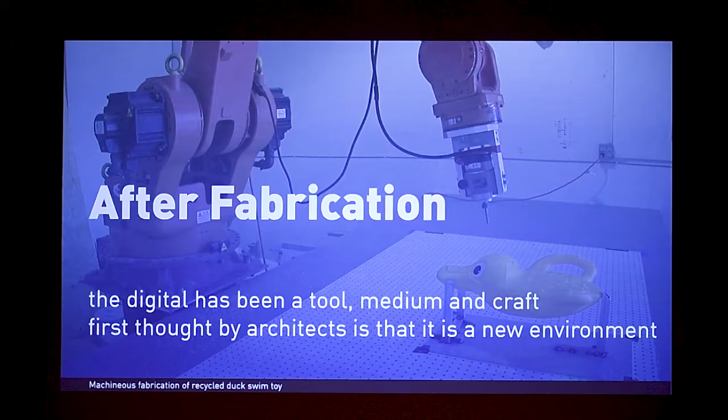I tried applying that to the scale of things like bricks. So with these blob walls and toy furniture, this was one of my kids' toys, and we went on eBay and bought several hundred of them. We would compose them all in a pattern where literally we would animate them to make a wall, then freeze that animation and turn that into a tool path, cut up each one of those things and assemble them. But I had a bit of an epiphany, I would say 10 years in.

It actually came from Rolf Fehlbaum, who's been the CEO at Vitra for a very long time, and I consider one of the great mentors for design. He asked me to design a chair, and said why don't you bring 3 designs, because you're not going to get it right. He said a chair's harder than a building.

So I had the idea to bring in a chair that you would 3D print, where every piece of the chair would be unique. I had another idea of a steel chair which would be built out of more components than any chair ever built before - that was my idea. And then I had another one that was built just out of 2 surfaces.

And I showed him all 3, and he stopped at the one that was built out of more pieces than any chair, where every piece was different, and he said, okay, that's the stupidest idea I've ever seen in my entire career. He said, why would it be innovative to build a thing out of more unique parts? That's not innovation. He said, that's retardataire.

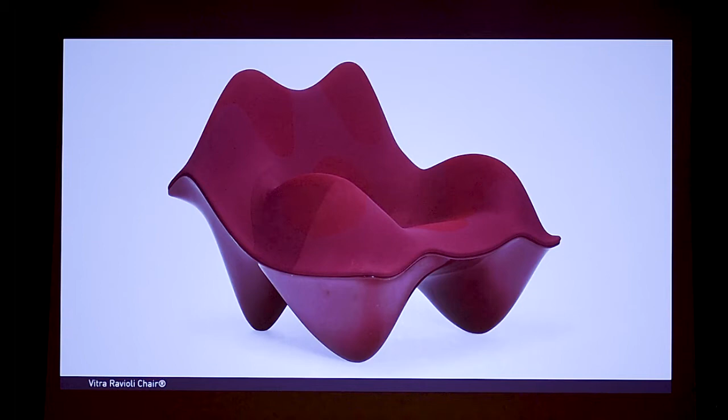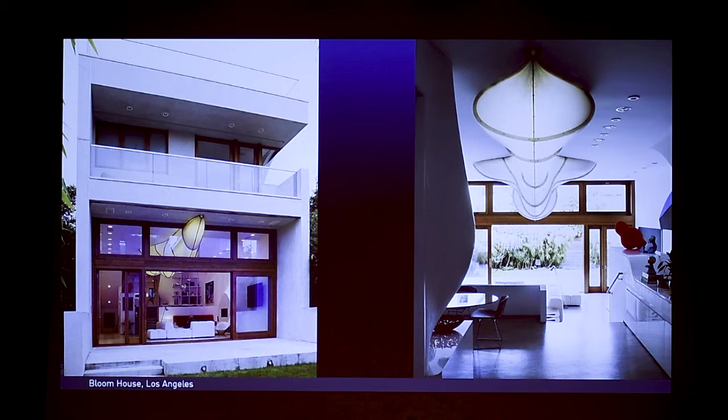So I took that approach and applied it to, for instance, the Bloom House, where we decided that the Bloom House would be just 4 surfaces, the floor, the ceiling, and the 2 walls. And every piece of equipment, like in the bathrooms, all of the plumbing and fixtures, the sink, the mirrors, everything was swallowed into one surface, even to the point where I didn't want to buy metal pulls for the drawers and the cabinets, so that every single piece of ergonomic information was built into one surface. And that surface was just the wall surface.

If you needed a sink, you folded that surface out and built a sink into it. A whole series of projects use that logic of not having doorways, integrating everything possible into single surfaces and building as much content into a single surface as possible.

So that idea of the digital bringing complexity through tectonics and numbers of parts and details, I quickly abandoned in favor of the digital having something more to do with performance and something to do with multiple types of performance all stored into one component.

And frankly, it's a very conservative idea, but reducing the material, reducing the weight, and reducing the components of construction. That, frankly, digital technology was combined with double and triple curtain wall systems, and it really became associated with more stuff. And I'm really interested in the digital being associated with less stuff, like higher performance, less stuff.

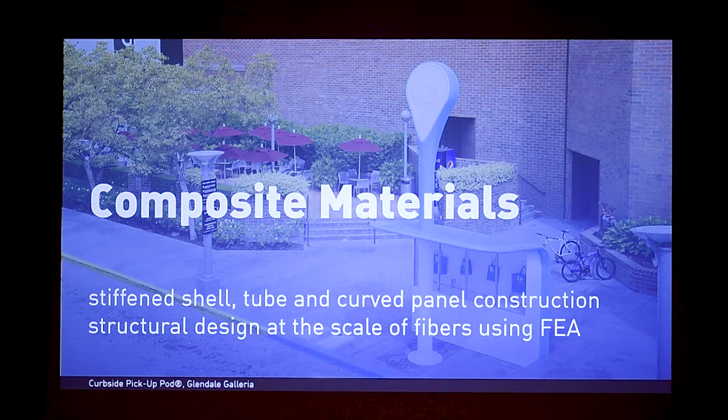The other thing that's great about composites is you're doing structural design at the scale of sometimes a single fiber. I'll show some examples where we're actually designing not beams, but pieces of string, like dental floss, and locating all of that fiber work digitally.

So the most recent example of this is I've been working with a company called Metyx in Turkey. They're a family that's been weaving carpets for hundreds of years, and they now weave carbon fiber and fiberglass for the wind industry in Europe. And they have a factory now in North Carolina and one in Hungary, and they're building a new factory in Manisa, Turkey.

And they asked if I would be interested in looking at the cladding, and frankly, we ended up designing the whole building. And it's really a combination of very conventional and old methods of construction with what they can do in their factory with carbon fiber.

So for them, the proposition is really not just the building. It's demonstrating the possibilities of what they can do with their material. And so the building has to exhibit some of the opportunities of composite construction.

And it's also nice that the headquarters building is right next to the factory, so we can get a part that's about close to 20 meters wide by, honestly, could be an infinite length. I mean, they could just keep building on the end of it as we took it out of the factory. But we could build really, really big parts, like a part as big as maybe this entire ceiling we could probably pull off nearly in just one piece.

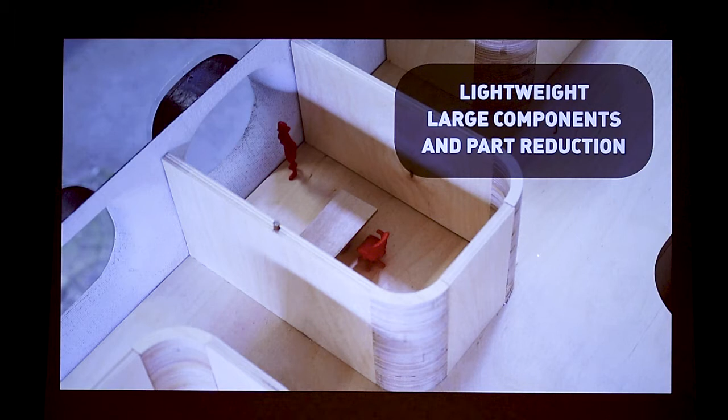And then you get all this kind of free plan around those individual rooms. So it's a pretty simple idea. The shells will be glazed on the ground and craned into place and hung on the concrete frame. So the shells are not rain screens. They're actually insulated structural envelopes that'll be built in these big super panels.

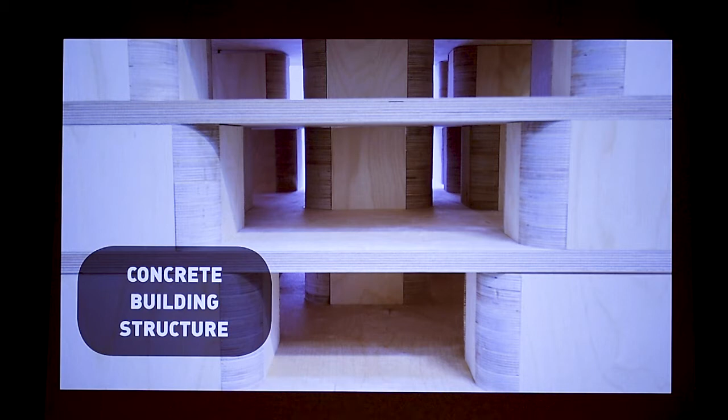Like I said, we'll have a poured-in-place concrete building structure, which is very affordable in Turkey. And then there's a few places where we'll have very high-strength, long-span shells that'll just get lifted right up onto the roof of the building. So that's kind of a model of the core of the building, just to give you a sense of those two different kinds of spaces in the plans.

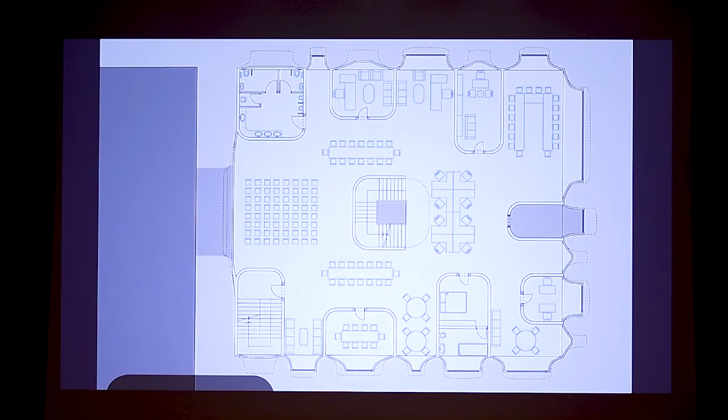We're doing 47 unique panels, and the way we manufacture them is there will be 2 or 3 big blocks of foam, and we'll cut the molds for a part, open mold, laminate the part, put in a balsa core, laminate another carbon skin on it, pop that part off, and then remachine that piece of the mold down a few more inches. Almost like if you've ever had that pasta in the giant wheel of Parmesan cheese where they just keep making more pasta in the cheese till it's gone. So that's the approach we'll use to manufacturing.

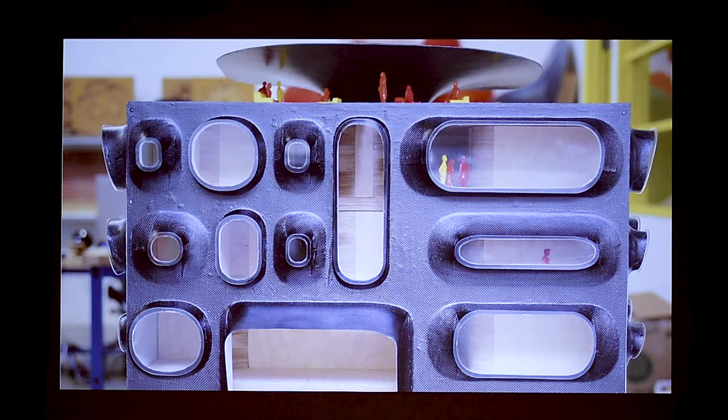Just a few views of the first study model we did of the project. I have to say...

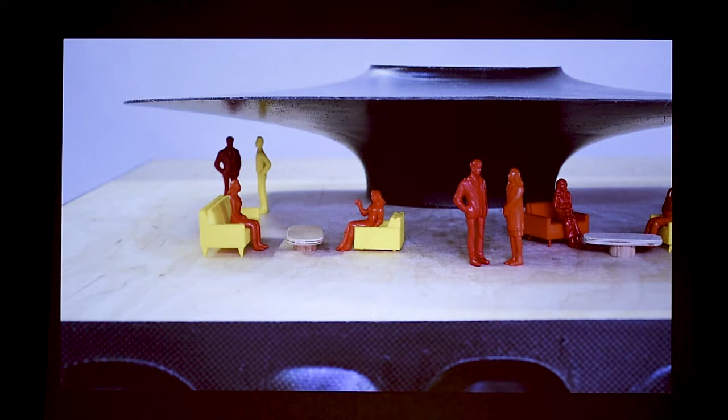I had to know a fair amount about carbon fiber before ever starting this, and getting to know about carbon fiber was really just an intuition. Talking a little bit for the student magazine about how you make decisions, I have to say I'm very quick to jump off the cliff if I think there's something interesting on the way down. So one way to learn a lot about carbon fiber is to design a foiling trimaran for yourself and build it yourself in carbon fiber. I would say it's about the quickest, maybe not the most efficient or economical way to learn, but...

So I decided to design this boat for myself, pretty much adopted an aerospace engineer, and the two of us worked for about 2.5 years designing this, and did a lot of interesting things along the way that ended up applying a lot to architectural projects and other projects, although at the time I would have had no idea.

I just knew it was worthwhile, but I didn't know how it would be worthwhile. If I had to come up with a business plan for this decision, that was a very tough business plan to articulate. But the reason I had to use carbon fiber for this boat is that it needs to weigh almost nothing.

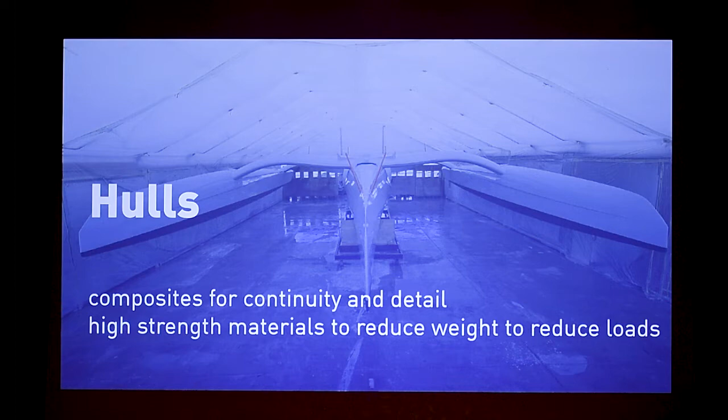The shells are all cored construction, meaning it has a layer of carbon and foam and then another layer of carbon. I'll show you a little bit about how it was made.

So the way you make a skin like this is you have fibers oriented in the 0 and 90 and the plus minus 45, and you just do 1 layer of each of those to give you an omnidirectional structure. Everywhere there's a load, you stack up strips of material, and the orientation of those strips is all based on finite element analysis of the structural loads. So you only put the structure where you need it. With a steel beam, you calculate the maximum structure you need, and then you just extend the steel all the way out to the 2 ends, because you're extruding it out of a machine.

It's cheaper to just waste material than it is to make it bespoke. This is the reverse — there are sometimes just two basic layers of carbon all the way at the tips and tail of the boat, but in the middle, the stack of carbon might be 1.25 inches thick on each side of a core. So you put the structure where you need it, and that's it.

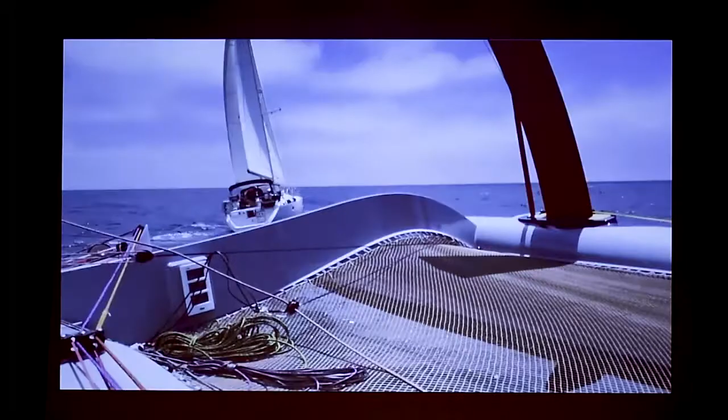We'll go by a sailboat, like a fairly high performance sailboat, frankly, right here. But what you should really notice is this poor powerboat trying to keep up with us. So it used to be when we would go sailing, we would pick sailboats and say we're racing them and they don't know it. Now we pick powerboats. And actually, if you like to ruin somebody's day, pass a powerboat with a sailboat sometime — they really don't like that.

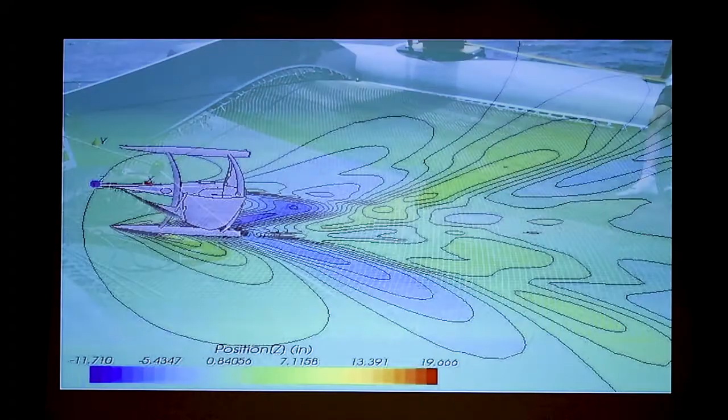So the way we modeled this, we worked with Cal State Long Beach mostly, and did the first coupled aero and hydrodynamic study in dynamics. It really brought me back to the late 80s and early 90s when we were first starting to model things in physics environments. But now, honestly, you could probably just do this in Unity — this is almost like game engine type stuff now, getting to be very similar to what was the absolute cutting edge of aerospace and nautical software.

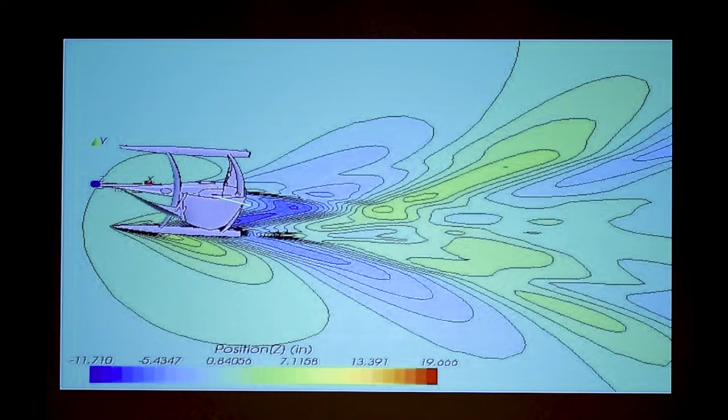So this is just studying displacement, which is how much the boat could weigh, so how much of it needs to be in the water. We did the coupled airflow study — if you see, you kind of have to be an aerospace person to think this is a crazy image, but you get the flow lines of how the shape of the sail and the position of the mast generates force, and you also get drag, flotation, and buoyancy as it moves through the water.

Usually those are two totally different organizations or different people — one does the sail plan and gives you the force, and then you hand that to the person that does the buoyancy and the flow. So, I'll talk a little bit about some of these curves and shapes and why they're the way they are.

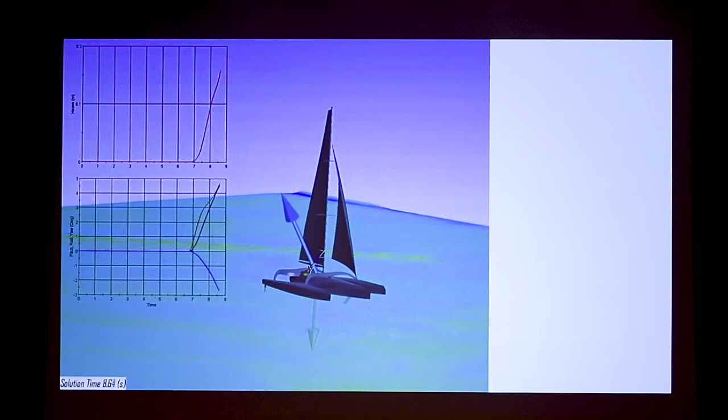When you put this in a 3D environment and nobody's driving, something bad always happens, because it is actually important that somebody's driving when you couple the aero and hydrodynamic forces. But what this is showing us is that we had this board placed too far back. The principle of the boat is that as you get moving faster and faster, this foil that's in the water lifts the boat out of the water until you're pretty much free of all the drag of the water, and you can just sail on these little sticks.

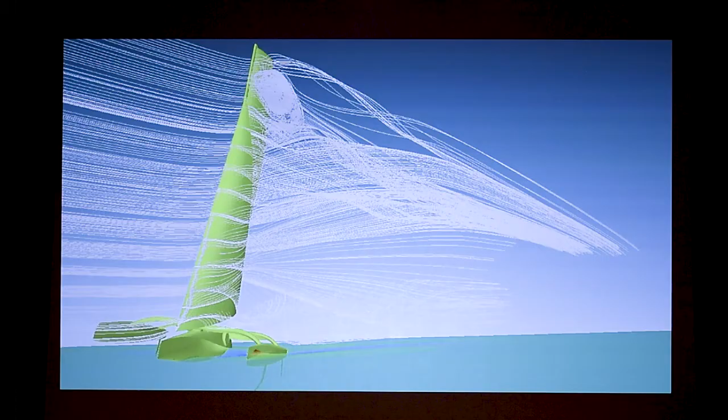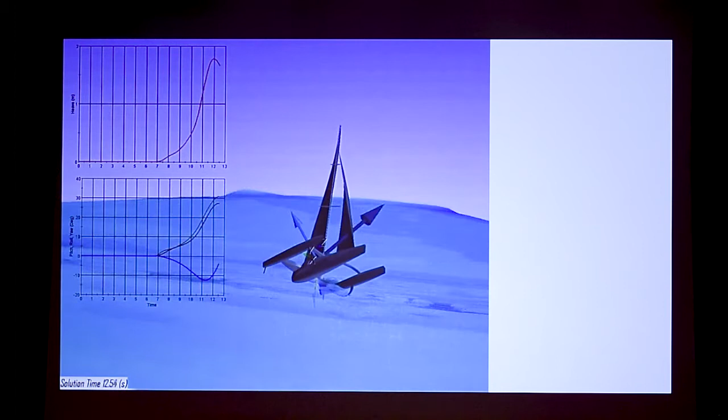So because of this, we moved this forward and also moved the point of effort back, meaning moving the mast backwards. This was like the old days — this animation took 6 very powerful multiprocessor computers 7 days to grind down, and we would look at it. It took us about 6 months to go through this process.

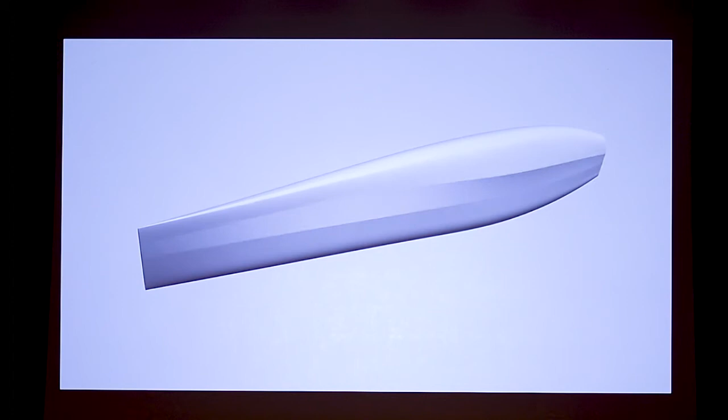One of the things with a boat like this is that it doesn't tip over sideways. It actually flips end over end, like the back goes over the front and you flip over like a cartwheel. The way to avoid that happening is by having a shape like this.

This chine, this crease in the surface, makes the boat get much fatter at the top. So if you nosedive and the boat starts to go underwater bow first, all that extra buoyancy comes into play.

You call it reserve buoyancy, and it helps lift the front of the boat back up before you trip and go upside down. This is here just to keep us dry, so that as you go through a wave, the wave hits that and gets sprayed away. I'll show you a video where you'll see these two shapes doing exactly what they're supposed to do.

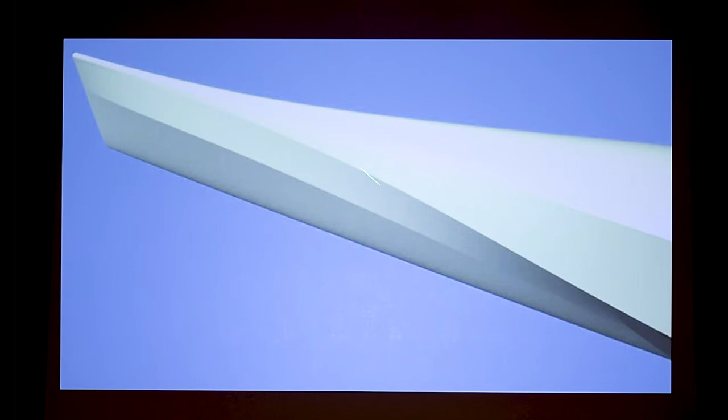So even if the wind is behind us at, say, 10 miles an hour, the boat's going maybe 20 or 25 miles an hour, so it thinks the wind is on the front. If you hit a wave and slow down, the wind goes from being in front of you to suddenly being behind you. If you go down a wave and plant the nose of the boat and stop, the wind comes around and pushes you the rest of the way over, and you flip upside down. All that extra volume up there has kept me a lot of times from flipping over upside down.

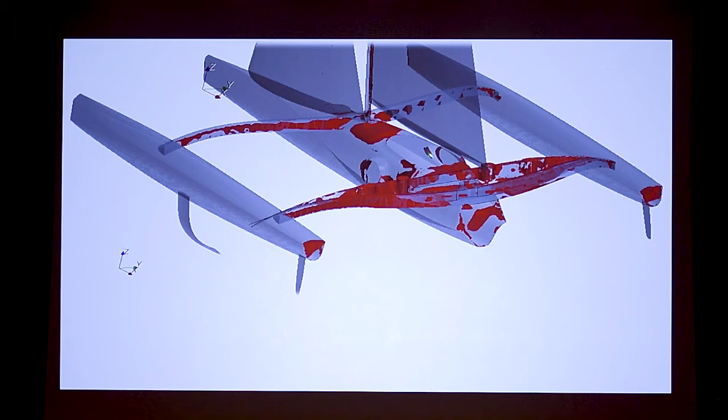The one other thing is when you go 30 miles an hour, air drag is actually a problem. We should probably wear Lycra suits or something, but the boat is pretty much optimized for airflow as well. This is the first feedback we got on drag, and all these red surfaces we had to get rid of, the same way you would in a car, to try to reduce the amount of air drag.

So this is what it came out as. This is to show you what one of those foils looks like when it's out. On the other side of the boat, the foil is up, but you see there's this little tip which gives you some lift. As you push the curved foil down, more and more of the curve goes in the water, and that's what helps lift you up as you move.

Just to kind of show you where you sit and drive.

Here's a video of, I won't speak for the other three, they're pretty good sailors, but more or less four amateurs passing a whole boatload of Olympic sailors. It's a good argument for equipment and for design, not skill, but every race we ever do, we always win by a lot. We have a horrible handicap, so we lose, we don't ever get any trophies, but we're always the first ones at the bar.

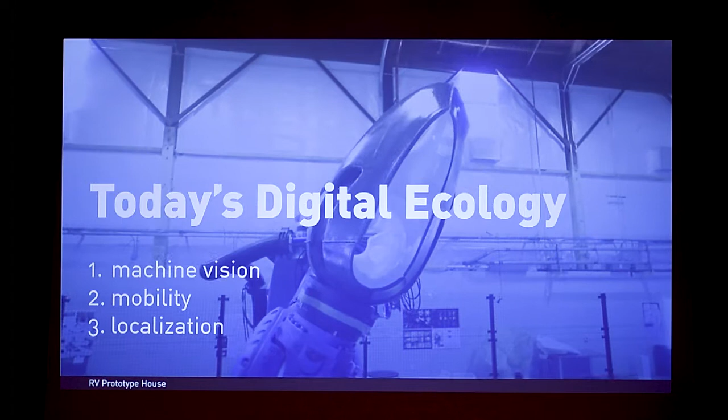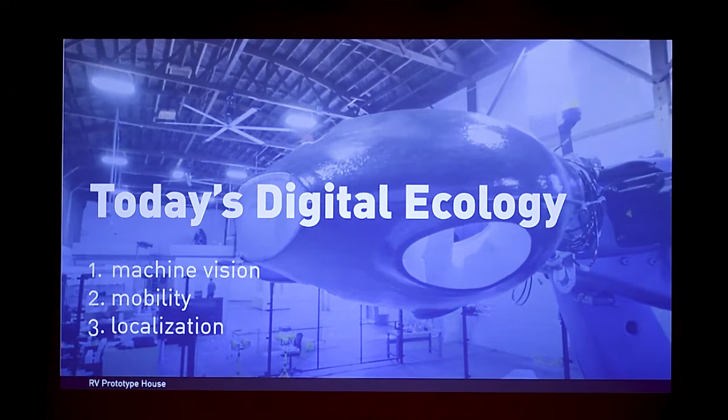That's the first thing I ever designed that literally moved. After all these years, with the first thing I showed you where I thought all you could really do is arrange parts in frozen space and then freeze it and hope to make somebody's eyes happy by how they moved around the room.

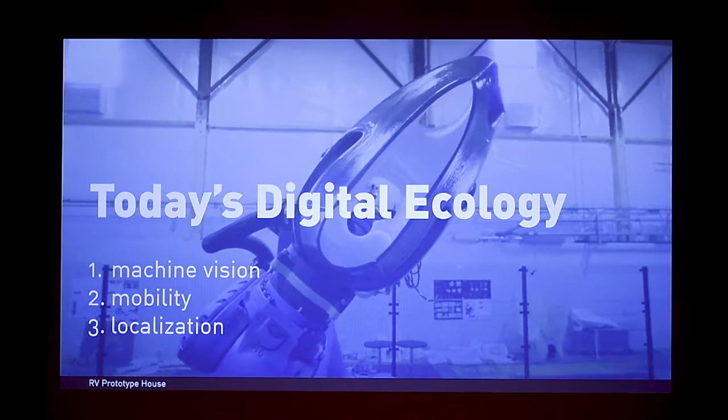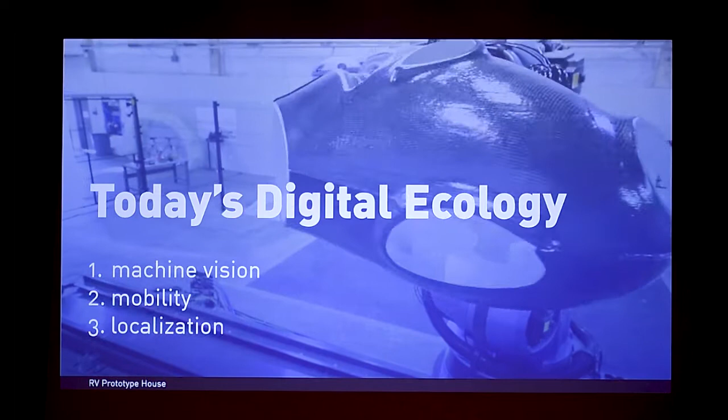After designing the boat and going 35 miles an hour with design, you suddenly say, there's more performance possible with animation tools than just keeping things static. So the things in terms of moving that I'm very excited about in the last couple of years: the first is machine vision, how architecture could start to see the things in it and move the things in it from the perspective of the machine, not the person. The second is mobility, literally approaching buildings the same way you'd approach a city. The third is localization, which I'll talk about.

I need an example to show you that. This is the first thing I ever designed for a machine. We opened up these offices in Boston, and I got a phone call saying, Greg, you need to pick out the carpet for the offices. I said, I'll just get gray bowl carpet.

They said, well, no, there's three samples, so will you just pick one of the three? And I jokingly said, just show two of the samples to the robots and see which ones the robots liked.

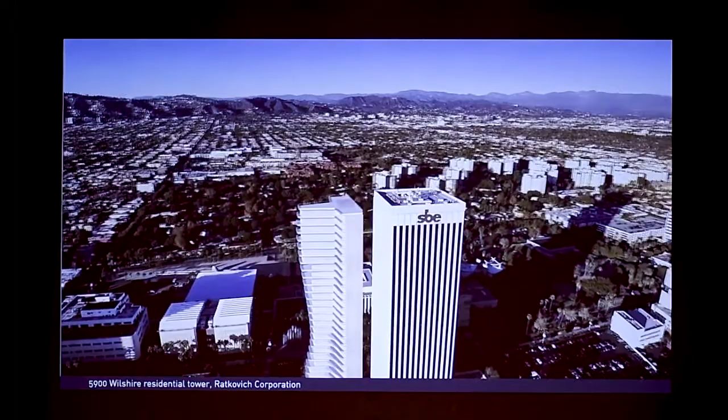And so, gosh, where are they? I think there is Sean and Melissa from my office flying this drone. Oh.

So the first thing we did was not build a 3D model, but actually fly the drone off the tower for the tower where we were making the residential proposal, and started to think completely differently about how you think about a tower on the skyline. When you have a drone, the design of a tower completely changes the whole problem. It actually became more about what it's like to be in this apartment where the drone is, and what you see in terms of Hollywood and the ocean from that apartment—more that than what kind of a hat we put on our tower. So I think those views are important.

The other thing is, I've had glasses to look at virtual reality on my head now for 25, 30 years, and have always been bored by it. But augmented reality I find very exciting.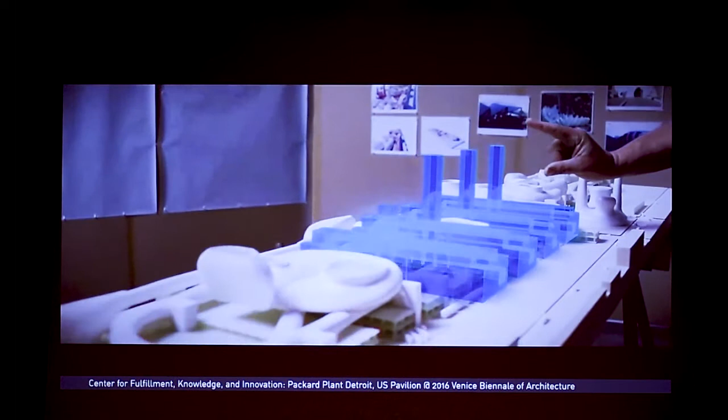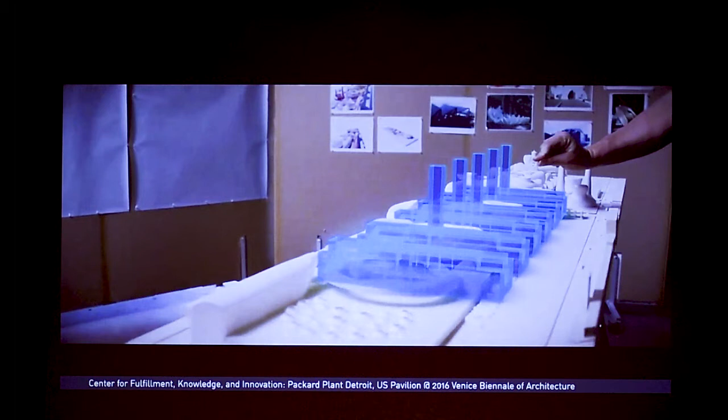What's incredible is, frankly, the use of it for construction. My students in Vienna, that's all we're doing now—they're going out onto the ring and building giant models with just strangers. They put HoloLenses or Tango tablets out with a set of components and have people with no construction skills suddenly building these things. It's amazing how big and how fast we can work now, that we're not building models using digital 3D printers and CNC mills, but actually using augmented reality devices to assemble things.

Yeah, so the other aspect of this localization is there's a need for new landmarks.

This is not maybe the most exciting example, but it's a case where literally Jaron Waldman came to my office and said, I've got a company that does work at the intersection of the digital and the physical. It was the first time I'd ever heard that phrase. He said, I need physical landmarks—would you be interested in designing the physical presence for all of the things my company does? And I said, yeah, sounds interesting.

What this company, Curbside, does is their idea was to turn shopping malls into Amazon fulfillment centers. So you would order things on the Curbside app, and it would tell you where that stuff was. If you said, I want a scented candle and a dog leash, it would say, okay, I can get you that at Target or I can get you that at the mall—take your pick. You'd pick one of those two and order it, and then they'd send you a note back or an SMS message at a certain point saying it's ready for pickup.

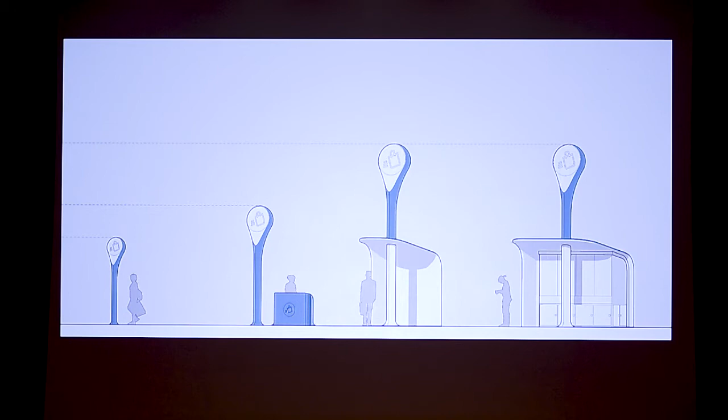So what happens is they'll dispatch a picker into the mall or into the Target, and they go in and pick the stuff. They put it in a bag, and then when you get close, it gets moved out to these pickup pods, and as you pull up, they ask you if you want it in the car or in the trunk.

So at the Glendale Galleria, where we built this pickup pod, they said, well, traffic and planning is going to need a traffic study to tell us the impact you're going to have on parking and waiting times for this particular site. So I said, okay, here we go.

So I called 2 lawyers, got their proposal, got the schedule for the study, pulled it all together, and sent it to Jaron about less than a week later. He said, oh, we have all that data already. I said, what? He said, yeah, we just had every Curbside employee in North America record how long it took from the time the car stopped to when it left, and the average time is 13-point-something seconds. Here's 100,000 examples of it from the last week for you to give to the traffic planner. We just walked in with the digital data. The traffic planner said, gee, that's amazing, okay.

So it's a new world. That's one thing I would say, is that the risk-averse, do-the-study-the-same-old-way approach of architects is so out of sync with the way the world of technology moves and technology startups move. It was a wake-up call.

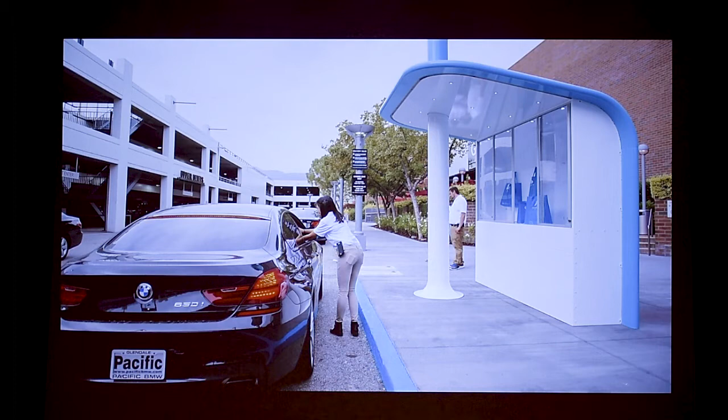So anyway, we had to build these things and set them up in less than a day. They're all carbon fiber and fiberglass, 100% composite manufactured. There's a mold, and it takes about a day to lay up one of them, and it actually takes 2 days to gel coat them and paint them. It takes longer to finish them than it does to make them. It comes in on a flatbed truck, and with a small crane, you can set the whole thing up in an afternoon. So it's also, in terms of construction, a very different paradigm.

I'll also say, just for the students, Curbside didn't have... I don't know what you think it's worth to have me design your physical identity, but I had a pretty good idea, and it was about 3 times what I knew they could afford to pay. So they paid me enough so that I could pay everybody, and then I got the extra with a multiplier of 3 in equity in the company. Now this is owned by Rakuten, along with the Barca Football Club and the Golden State Warriors. It's a good thing to take risks.

It's the 4th time I've done that, and the first 3 times I got washed out in acquisitions. But, you know, the venture world says 1 out of 10, so I'm 1 out of 4. It's a good thing to also think about new ways of doing business, frankly.

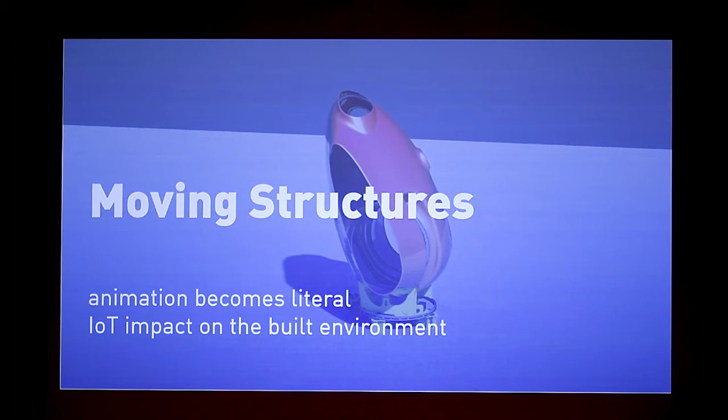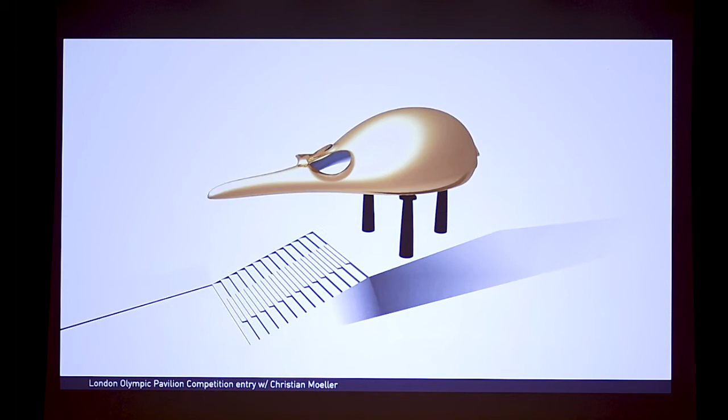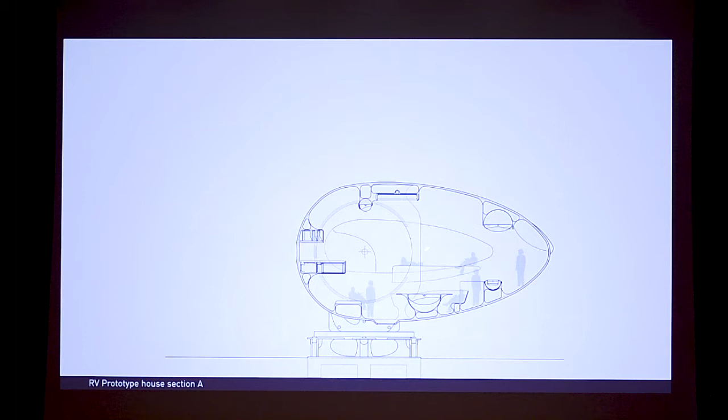The idea is that you roll the house and the furniture disappears into the house, like on an old-time boat. So that's your nightstand with all your stuff on it, but it's sitting with a lamp on the bottom of it - that's your bed. All of these surfaces disappear and pocket into the walls until you roll the whole house, and then the stuff that was in the wall unrolls and becomes something you can occupy.

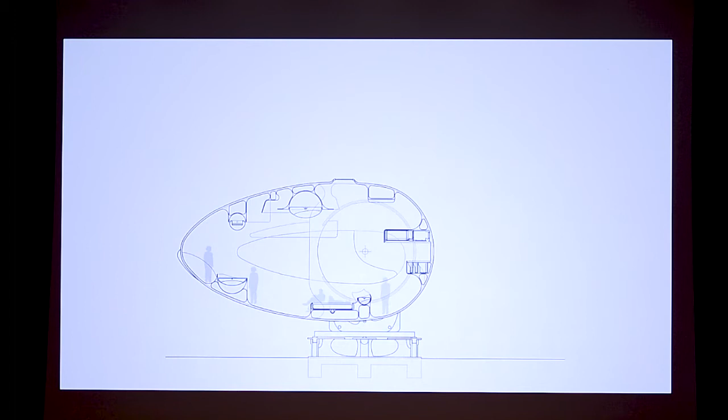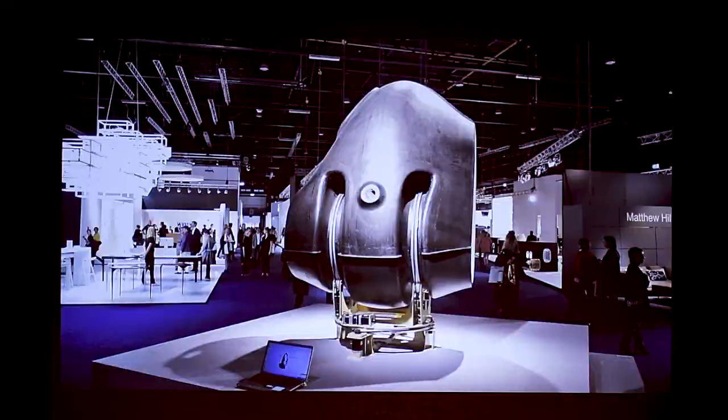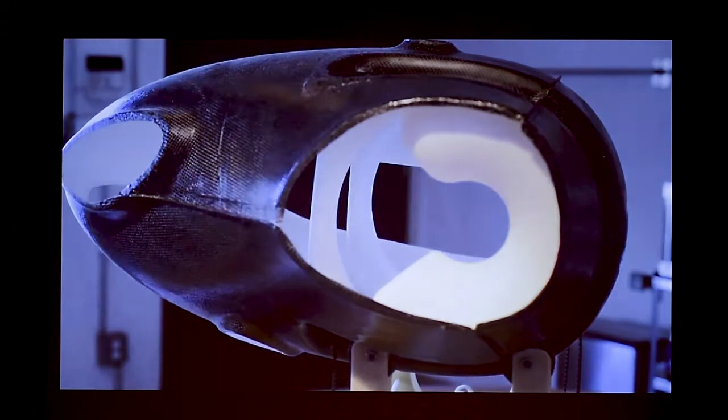The big trick was making the robot to roll the house around. So we made this 1/5 scale robot that would roll the house, and we also built a little app for everybody that visited so they could download the app and drive the house - just using TouchOSC. This was the first time I'd ever, within the office, built a machine and programmed it digitally.

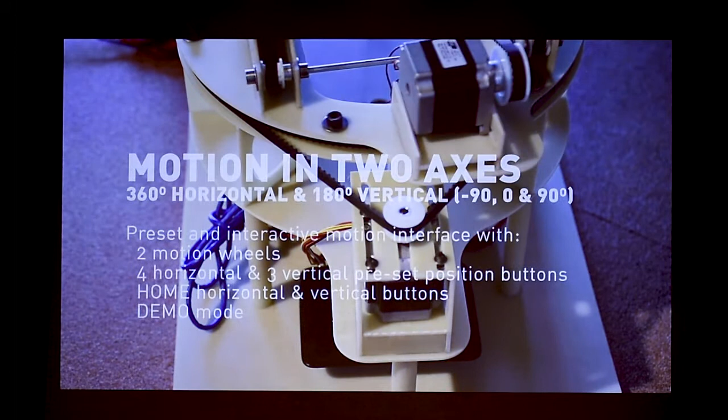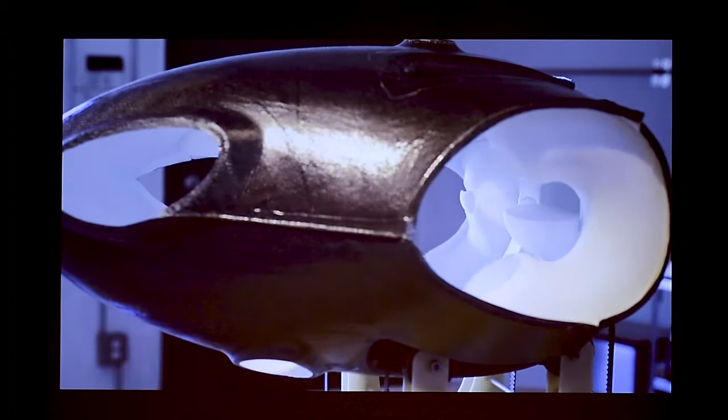And so we started just putting this on everything. We put stepper motors on a table and made an interface so we could drive the table around with a phone. I had an idea that all the furniture in my office already had wheels, but I thought it should all drive around, and it should learn where it is, and then it should start making decisions about where to go based on where it had been.

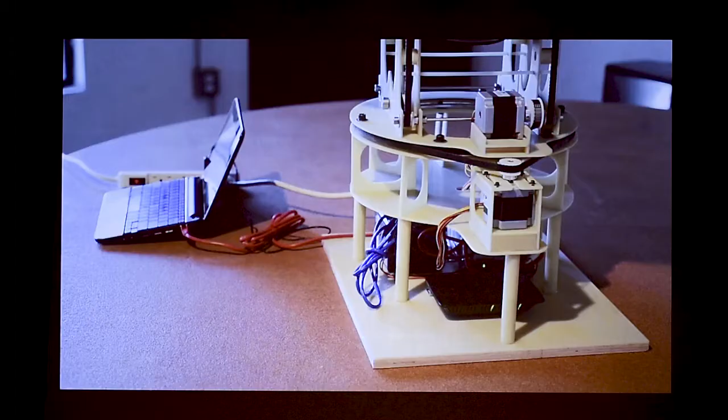So if every Tuesday we were always pushing the table away, then Tuesday the table should just drive away at 11 o'clock in the morning. That way we'd have this other relationship with the built environment, where the built environment would be watching us, and it would start doing things that would provoke us, and then we would do other things, and pretty soon you're in a totally different relationship with your stuff.

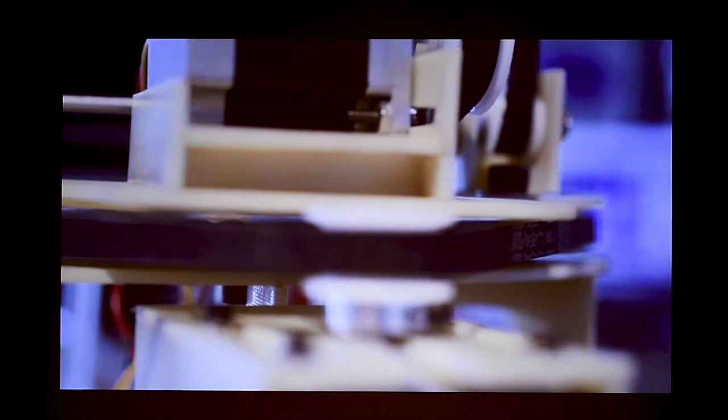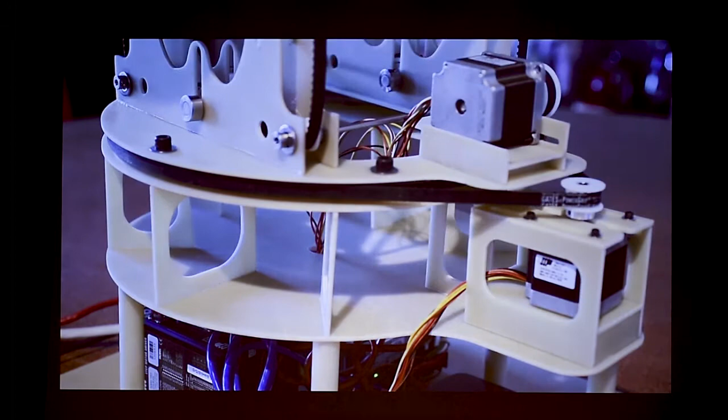So I went to 3 furniture companies and asked them if they would like to start to do this with their furniture. All of them said, we know we're going to need to do it, we really don't want to do it. If we do it, we want to do it with you, so tell us when the other people do it, and then we'll start. These are furniture companies that I thought were already doing this, frankly.

Anyway, that is the genesis of the Gita, was that conversation. I'll get to that in a second.

The other thing I thought I'd talk about is technology which is close to the body and ergonomic, like the ravioli chair a little bit, but that isn't just about shape - it's also about electrical systems and environmental systems.

Nike came to me about developing a chair for the NBA, and the one thing that's amazing about Nike, and actually just amazing about sport, including the boat, is it's a change in paradigm. Instead of boats float, boats fly. That's the paradigm that led to the trimaran.

But in order to get the boat to fly, you have to break down every single part of the boat into its absolute smallest problem statement and then solve all those problems in a new way in very, very small increments. You're fighting for every single ounce or every fiber you can save. I'm really sorry, but that's how the world works now. You have to have a new idea that's a big idea, but you don't solve it with a big solution - you solve it with thousands of tiny incremental solutions.

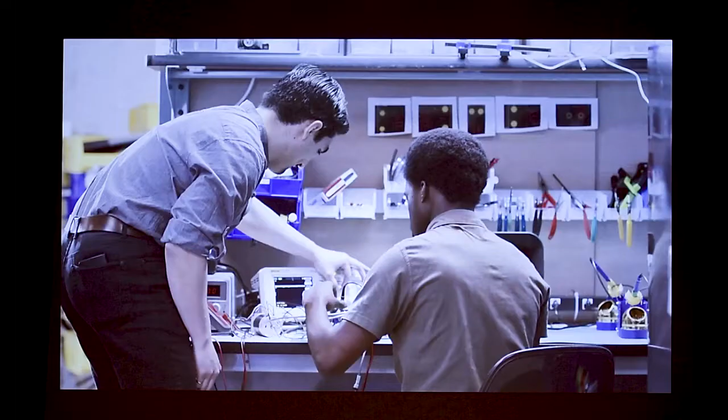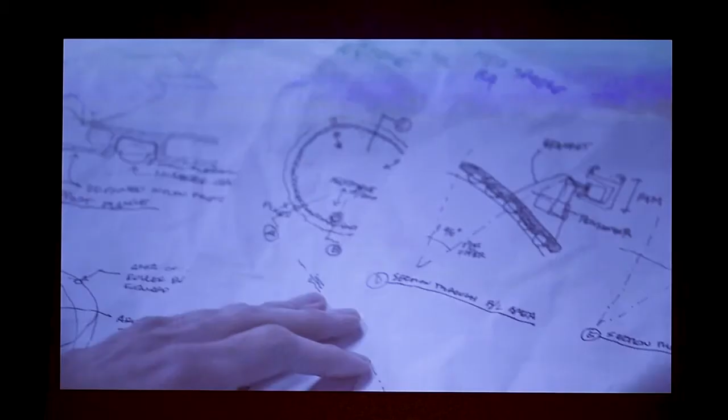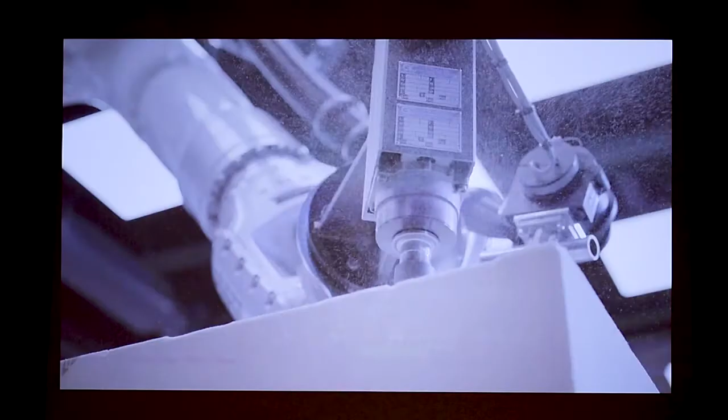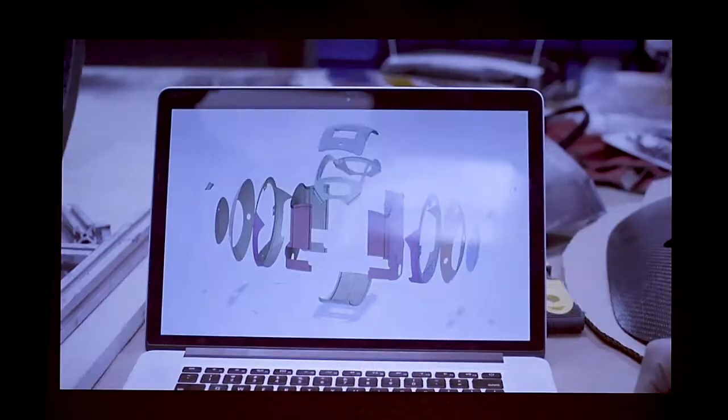This is what we started with. We want to understand the new needs of young generations, because we come from Piaggio. We see cities in a different way than an automobile company. We think about people moving in a granular way. Granular mobility is a concept we have elaborated within Piaggio Fast Forward to call attention to those spaces that we navigate as pedestrians, as citizens of the 21st century city. We thought, let's make a product which engages all those different cities and the way people move in them. Gita was designed to leverage the power of human navigators of urban spaces to make sense of them. We imagine it as a kind of Vespa for the 21st century. Gita is meant to help the human, from a young kid in school to an older one in a hospital. It's a total fusion of two technologies: it's a land drone, a cargo bot, a Sherpa, and a smart device that learns the environment and maps it as it travels with human guidance. It moves as slowly and can maneuver the same as a human.

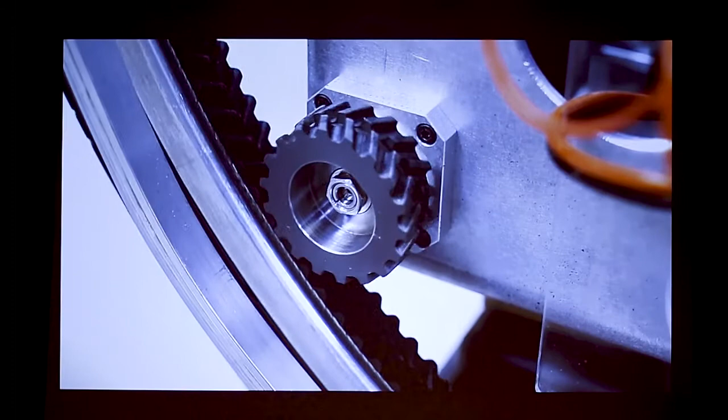Okay, so you get the idea. But from those first ideas about building a device that would map and move through the world on its own without positioning, is really where we started the company.

The idea is just very simple: instead of getting in your car to carry a couple gallons of milk for half a mile, or because you want to bring your athletic equipment to the soccer field, or your kids' stuff to school, you could actually walk.

So we've been looking at American cities and American transportation, finding out all kinds of amazing facts about how to help people be pedestrian, but how to make a piece of technology that doesn't just solve pain points — a term I hate — but actually helps people be more connected to their neighborhoods, more active, and more social.

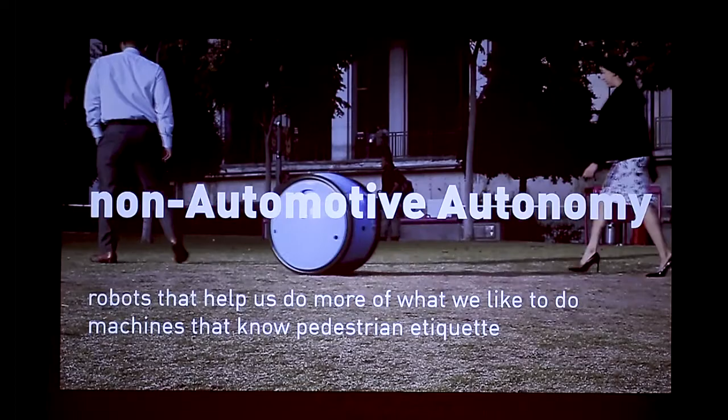So this is the place we want to be focusing on, not automotive. So we're not doing autonomy, like a car would do autonomy.

You'll hear a lot of people say, well, is a robot going to replace me? And they'll say, well, it's only going to replace those things you don't like to do. So instead, we want to have robots help us do more of what we like rather than replace people doing what they're doing. So we're not like a delivery robot - you don't order a burrito on your couch and have it fire the burrito through your window at you. You get your butt off the couch and go walk over to the burrito master and have a relationship with the person making your burrito.

And I won't go into it, but we're teaching them a lot of pedestrian etiquette. So our version of autonomy, our 5 levels of autonomy, is first just following. The second is paired autonomy, meaning if you turn a corner or move in a crowd, it can infer where you are and follow you through a crowd. Smart behaviors is that you can hold a door for it and it'll know how to go through a door - it'll do all kinds of things that we don't think of as behaviors but exist. And then when it does something on its own, it'll do it on a route where we teach it, so we can maybe send it somewhere that it's already been taught.

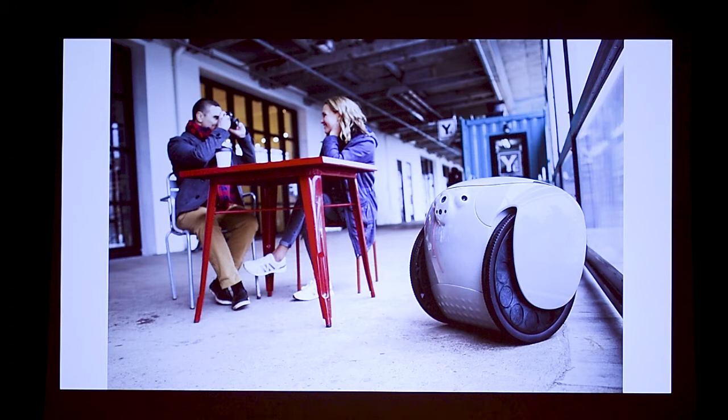We managed to make it smaller, quite a bit, like 20% smaller in footprint, but it carries a lot more stuff, a third more volume actually. Because this is one of those things that's like somebody's building - you ask everybody and they say, well, I really want a huge amount of cargo capacity, but it has to be really small. So we tried to be as efficient as we could with the footprint of it.

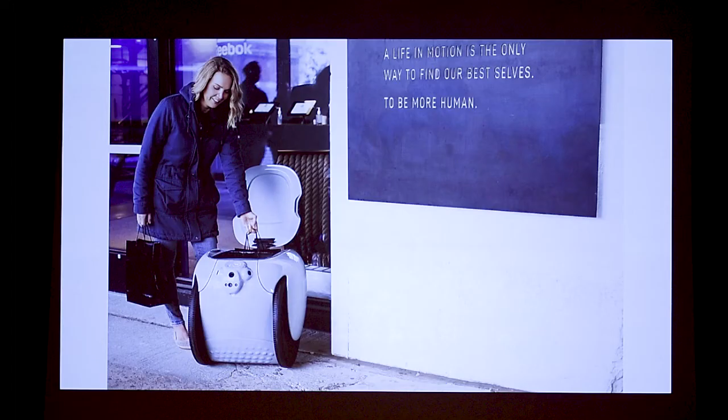And this is just kind of some of the use cases for how it might get used. This is at Reebok's headquarters, but we found this on the wall, which is really great: 'Life in motion is the only way to find our best selves and to be more human.' So really what we want to do is make, it's very counterintuitive, a very high-tech robot that helps us be more human.

And so in the state of Florida, we have legislation for ourselves. Texas will probably be next. Utah is coming. We're going state by state making sure we get legislation that lets people understand that not all technology needs to be like city killers and job killers, and that this isn't going to be a whole bunch of autonomous robots driving around the sidewalk by themselves, but this could be more people walking around doing stuff in the city. So, thanks.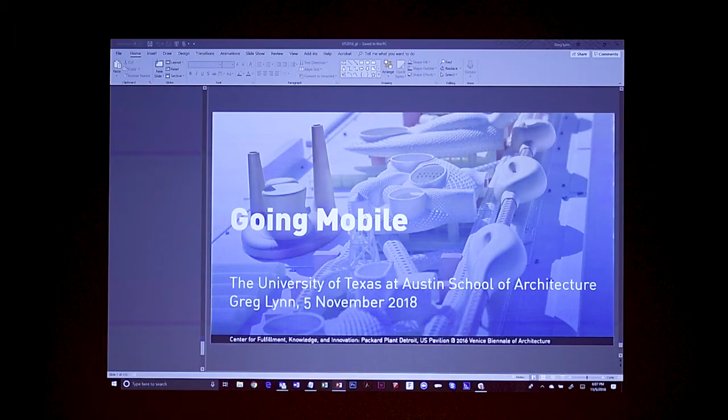Of course. Yeah, of course.

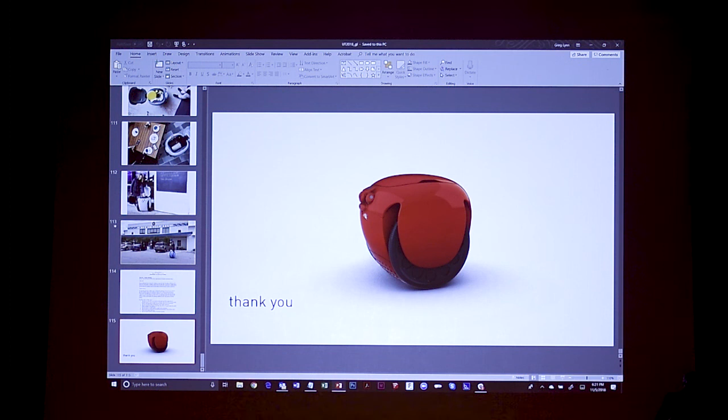For damage to it or for liability? So in terms of dents and scratches and things, we could replace panels, so I don't really think you'd bother to insure it. I guess if you'd insure a phone, you might insure a device like this, but I don't really think that it'll be that big a deal. I think what's more important is that we want to make sure there's not a lot of barriers to ownership. That's why I was at the Capitol today - to make sure we don't have to put a license plate on it, because if we put a license plate on it, that means you got to go to the DMV, and if you have to go to the DMV, you're going to be like, eh.